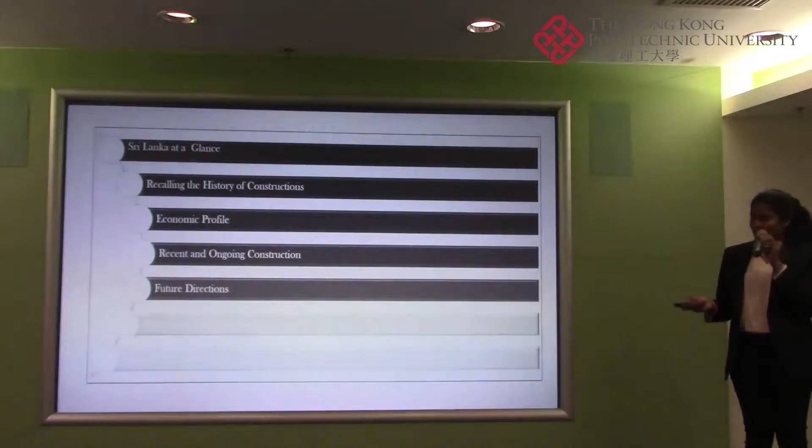Future directions of the construction industry: sustainable construction.

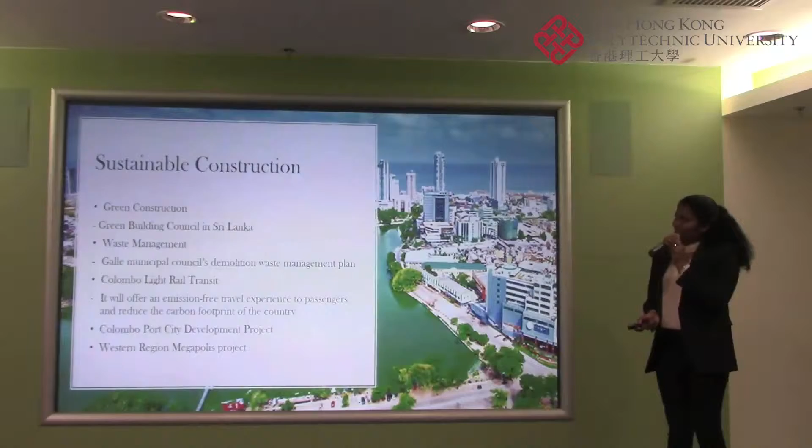Everywhere in the globe, they are talking about sustainable construction. Green construction is one of the initiatives contributing to sustainable construction in Sri Lanka. Therefore, a Green Building Council has been initiated in Sri Lanka, establishing its grading criteria, and there are many construction projects undergoing with these regulations and grading criteria.

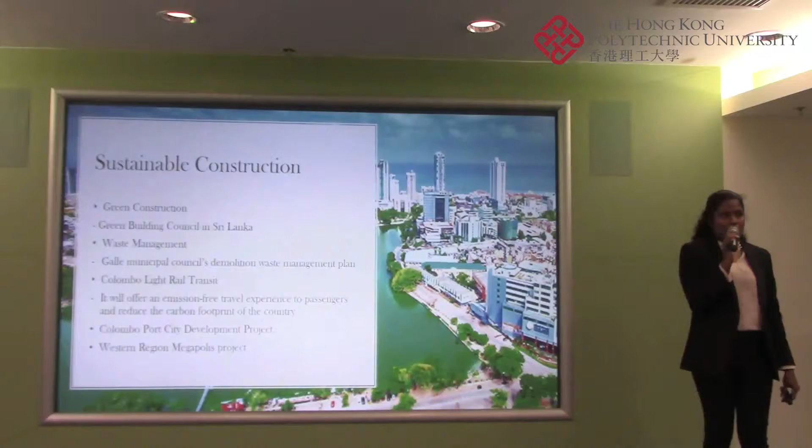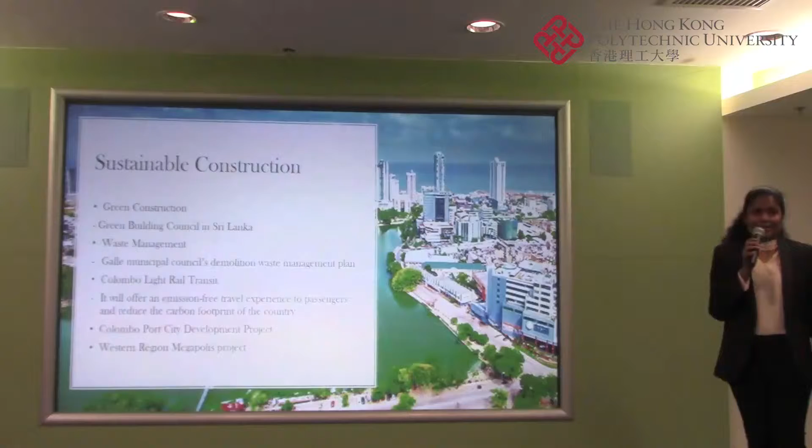The waste management plan adhered to by the Galle Municipal Council for demolition of buildings is another significant area to be considered in sustainable construction. Most municipal councils in Sri Lanka are planning to adhere to the same demolition plan in time to come. As explained earlier, the Colombo Light Rail Transit System is one of the smart city development projects.

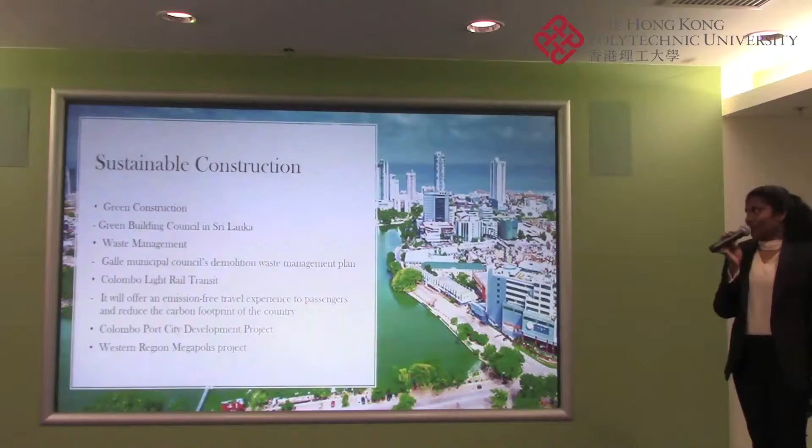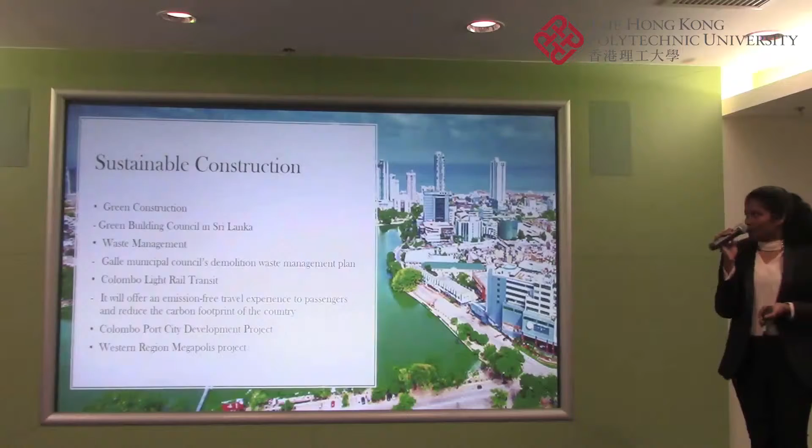This construction will offer an emission-free travel experience to passengers, contributing to sustainable construction in Sri Lanka. Apart from that, the Colombo Port City Development Project, as discussed earlier, is also another contributor to sustainable construction. The Western Region Megapolis Project, which I will explain further in coming slides, is also a significant project which contributes to sustainable construction.

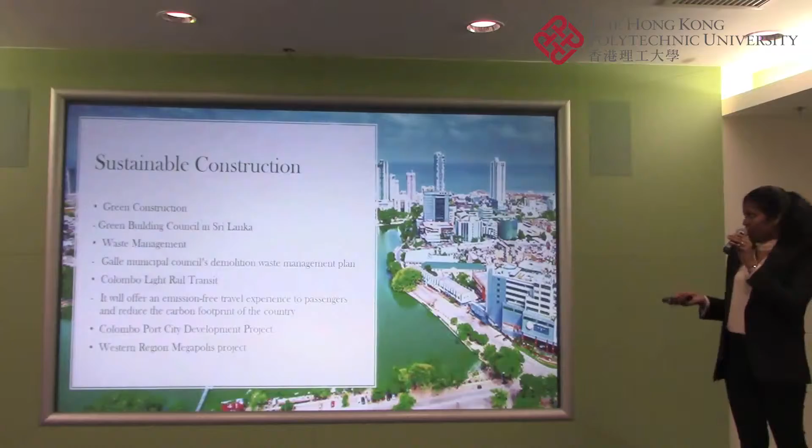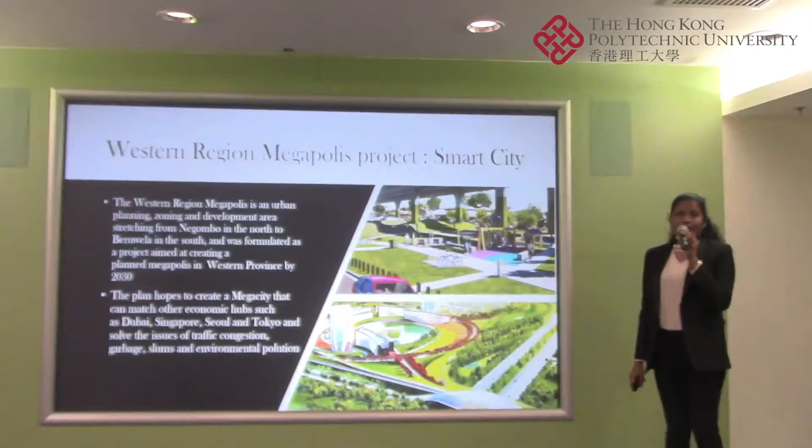The Western Region Megapolis construction project goes beyond the smart city concept; it's an urban planning, zoning and development area stretching from Negombo in the north to Beruwela in the south, formulated as a project aimed at creating a planned megapolis in the Western Province by 2030.

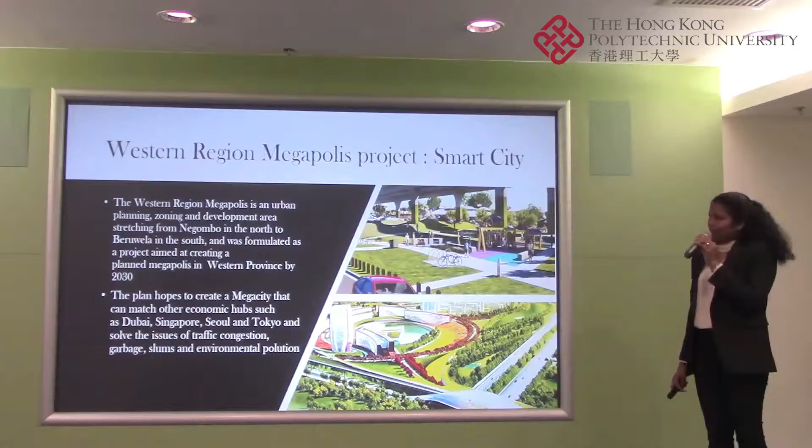The plan hopes to create a mega city that can match other economic hubs such as Singapore, Seoul, and Tokyo, and it will be a great solution for traffic congestion, garbage, slums, and environmental pollution. There are 11 sectors to be considered in the Western Region Megapolis Development Project.

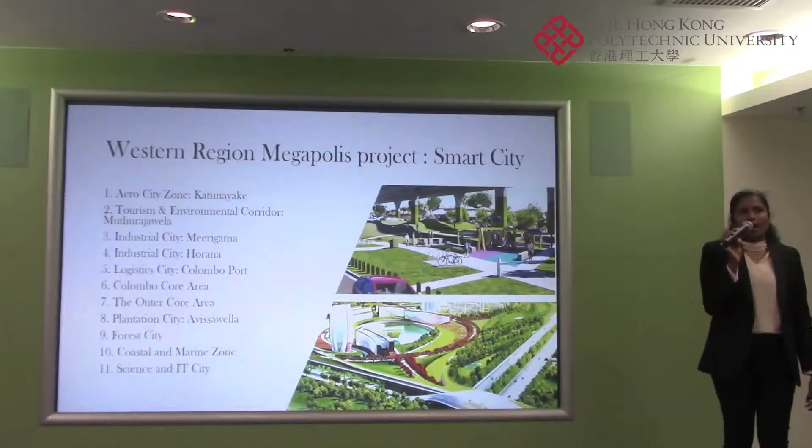The first category is the Aero City Zone at Katunayake. The government is going to expand the airport area of Katunayake, building a new passenger terminal, and with the outer circular highway, they are going to make the transport system more efficient towards Katunayake airport.

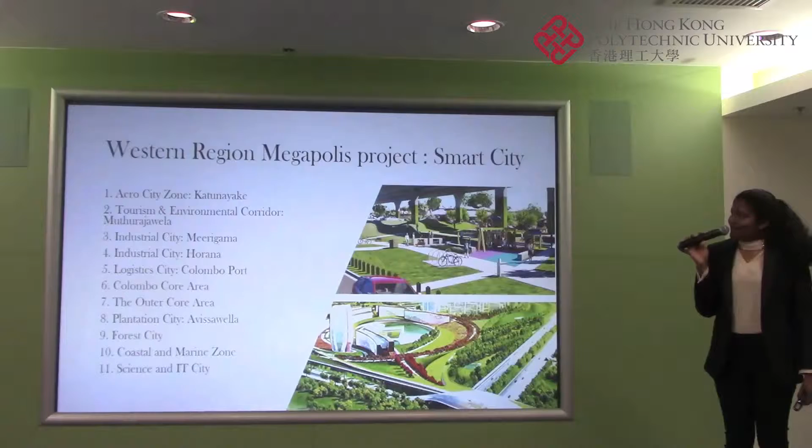The second is the tourism and environment corridor at Muthurajawela, basically focusing on the hotel industry and tourist attraction. The industrial city of Meerigama will focus on small and medium scale entrepreneurship, with pharmaceuticals and other food and beverage industries located in the Meerigama area.

The second industrial city will be Horana, where massive industries such as tyres, tubes, and energy generation projects will be established. The fifth sector is the logistics city.

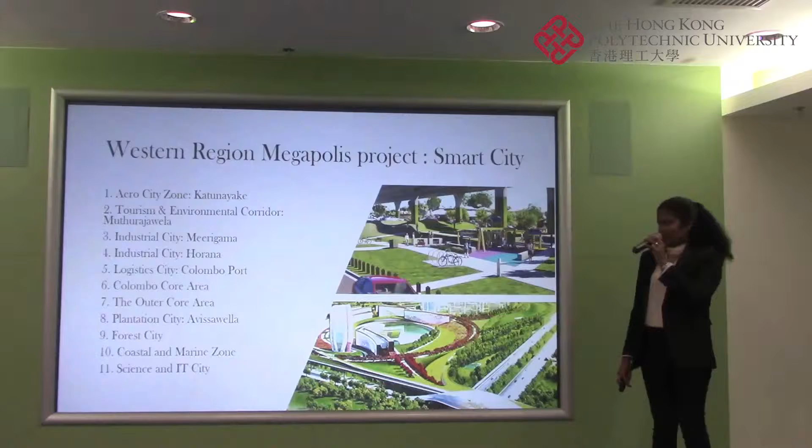Circulated by Colombo Port, we are going to have an electrified railway system as well as massive bus transportation, ferry and boat transportation systems within the city of Colombo. We call this area the logistics city, and the major smart city can be seen in time to come. Other core areas are also expected to be developed along with this Western Region Megapolis project.

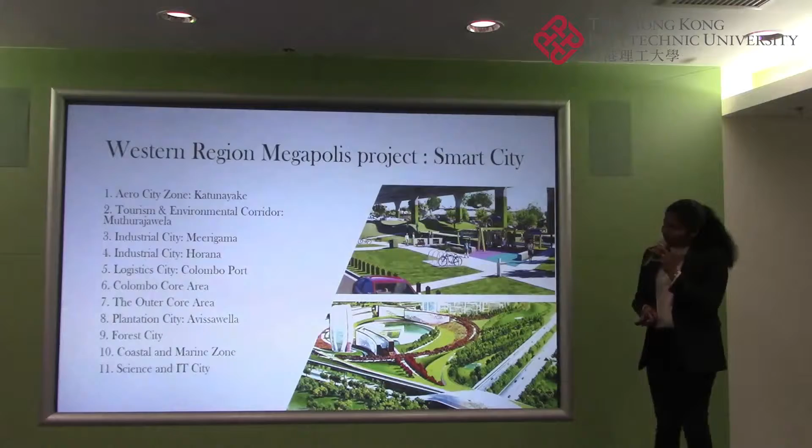These areas will be moderately dense over time. The plantation city will be Avissawella, where we expect much agricultural production and exporting facilities, achieving a sustainable city. The forest city will also be located near Avissawella, targeting ecotourism and go-green concepts.

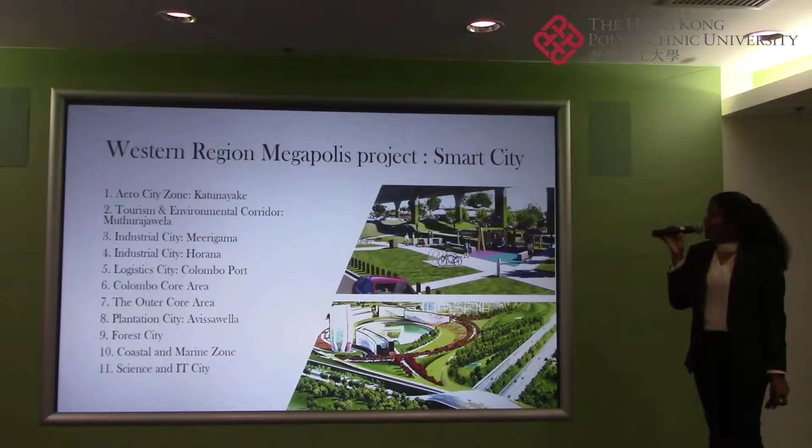The coastal and marine zone along Colombo city will also be redeveloped according to smart city concepts, mostly targeting the international crowd. The science and IT city is the last consideration of the smart city concept.

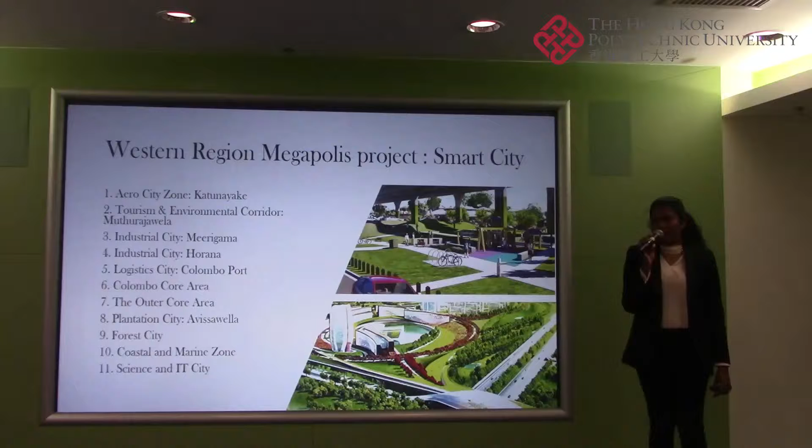We are going to locate the Science and IT City from Homagama to Kaduwela, and this area will be basically allocated for research and development centers on nanotechnologies, robotics, energy efficient building construction, and other IT-related research and development.

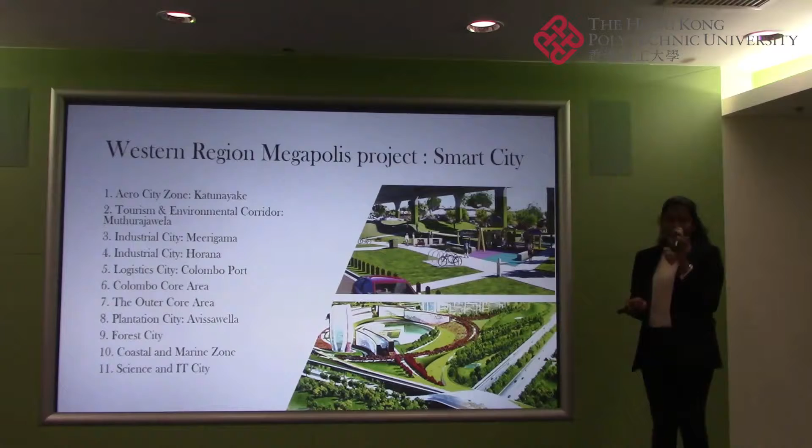More or less, this Western Region Megapolis project will contribute to the smart city and the sustainable world in time to come. As the second solution of sustainable construction, prefabricated construction is also initiated in the Sri Lankan construction industry.

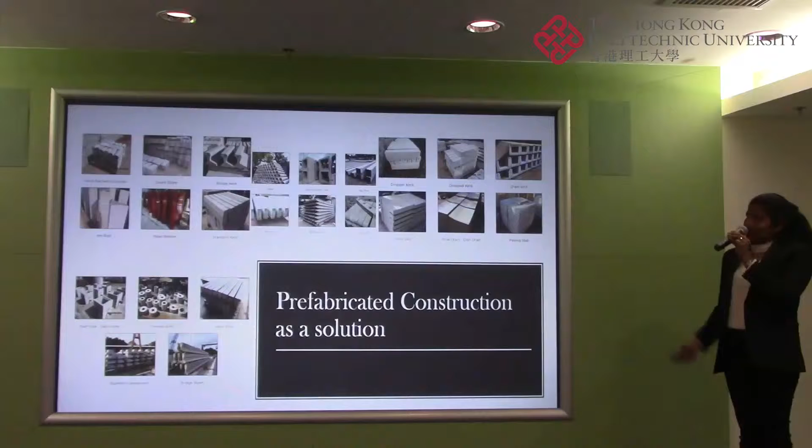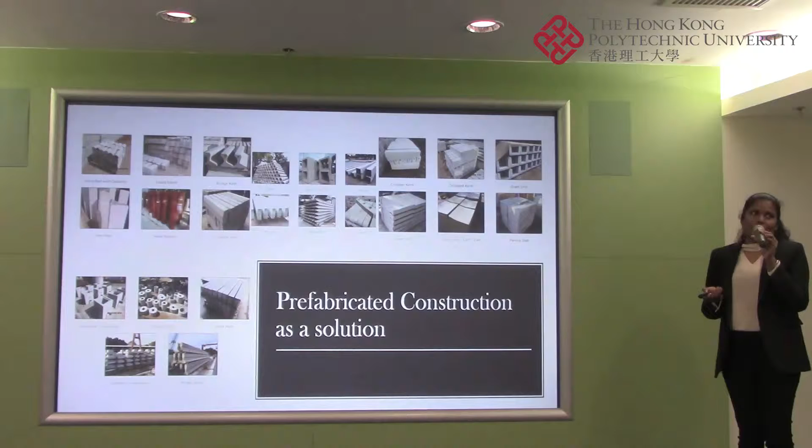We cannot see mega constructions in Sri Lanka using prefabricated construction elements, but there are some apartment complexes and other infrastructure facility development projects which utilize this kind of prefabricated construction element in Sri Lanka. Now it has become an emerging trend of construction, and it gives the answer for the requirement of labor, addressing the shortage of skilled labor in the Sri Lankan construction industry.

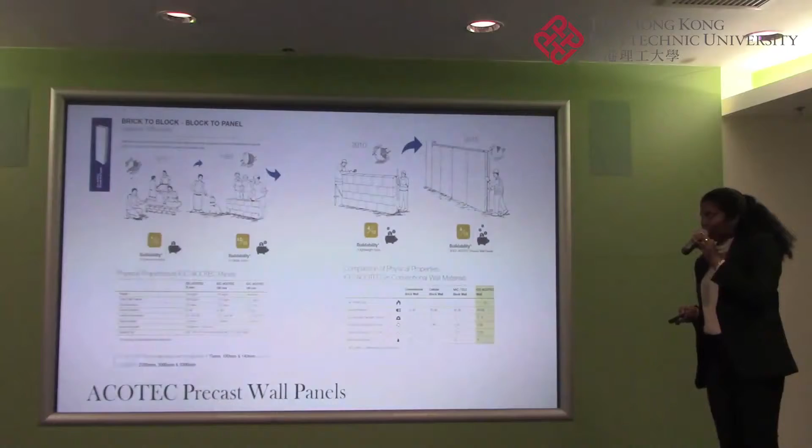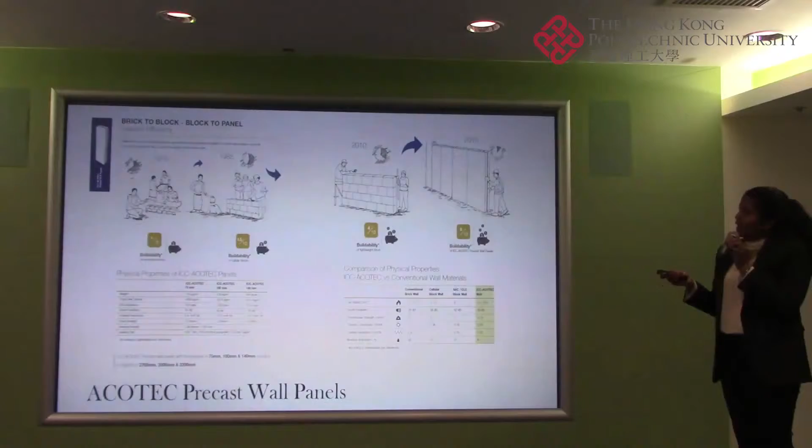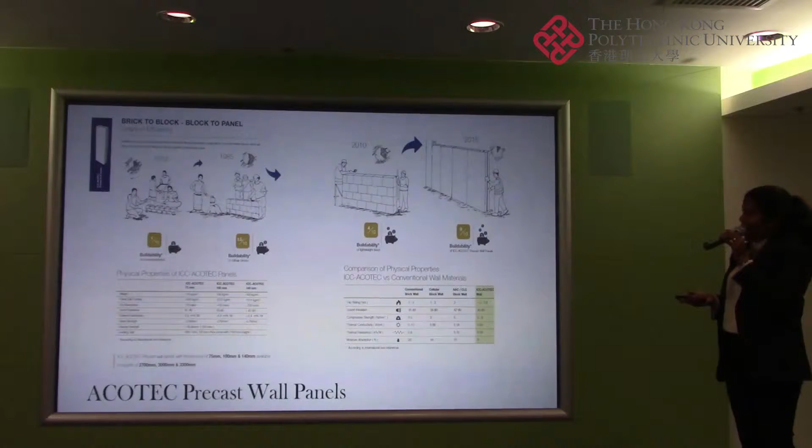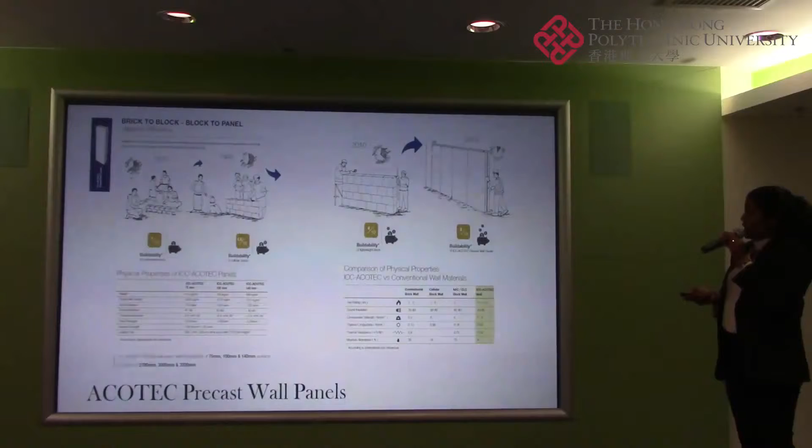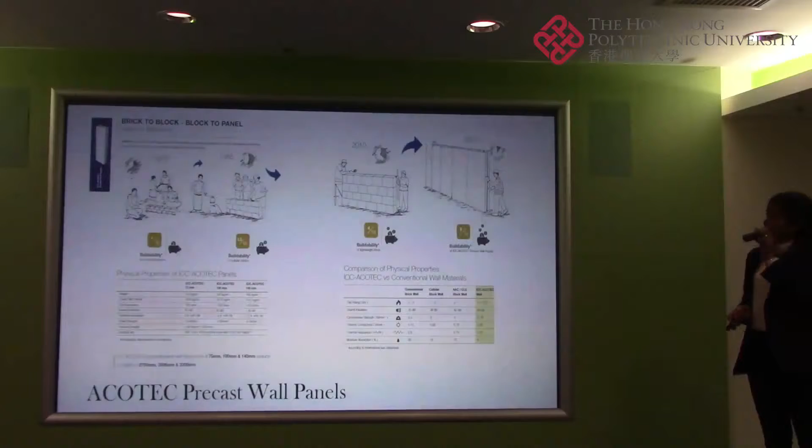Then in 2015 we shifted to precast wall panels, and now the buildability of the construction process has increased to 0.9%.

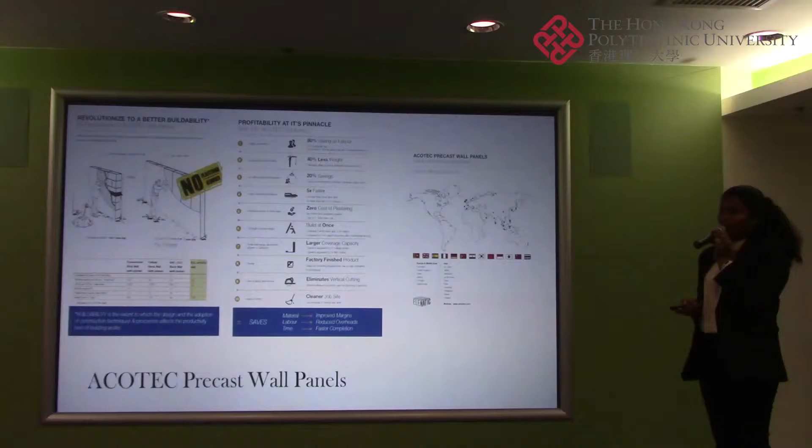Another important feature of this construction material is that we need not have plastering in construction, and it will give us a better quality of work.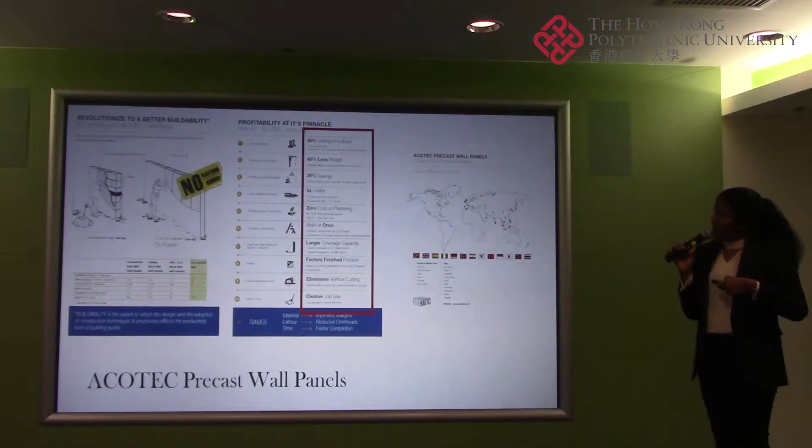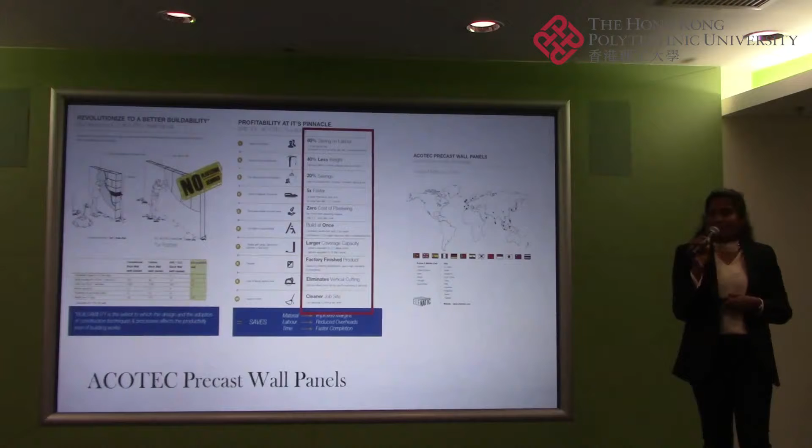Therefore, these ACOTEC precast wall panels allow us 80% savings on labor, 40% less weight of handling. It will reduce machinery and equipment cost, 20% savings on formwork reinforcement, and it's 5 times faster, with zero cost for plastering, and it can be built at once, which speeds up construction projects.

Larger coverage capacity is also possible with these panels, and it's a factory finished product that eliminates vertical cutting. There are inside cores on these ACOTEC panels, and we can easily install service lines using these cores. Finally, it will allow us to have a cleaner job site.

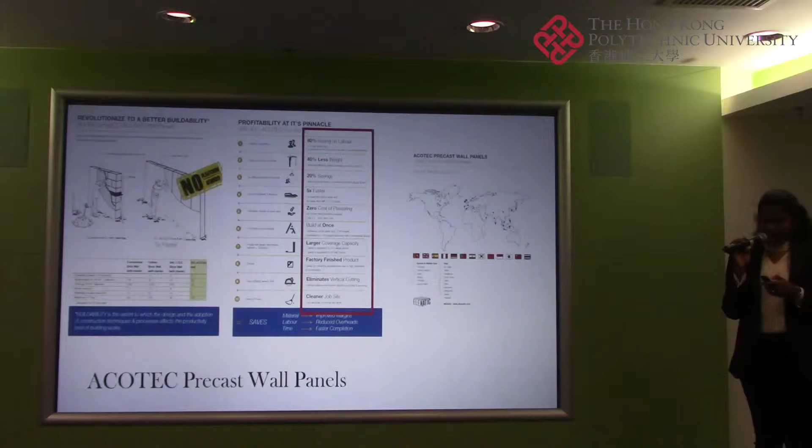As the initiator of precast wall panels, we are exporting our products to a number of countries, including Germany, the United Kingdom, and Spain as well.

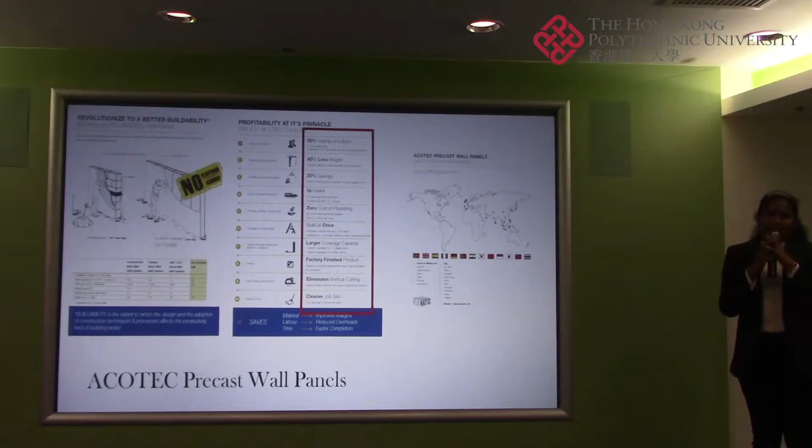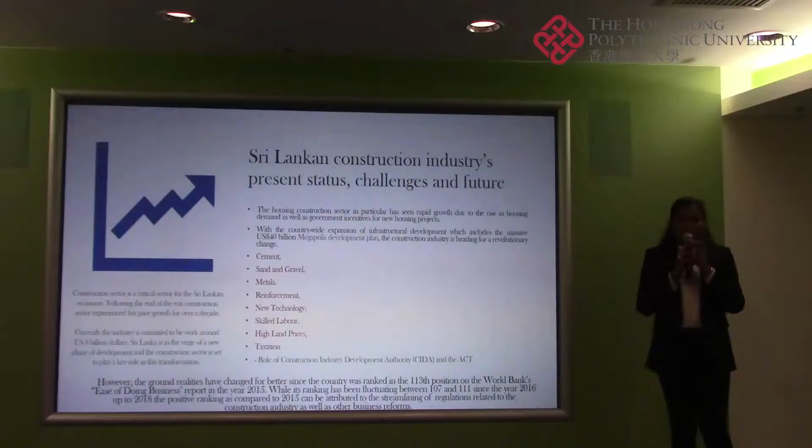The present status, challenges, and future of the Sri Lankan construction industry. Although there can be a booming and rapid growth of the construction industry realized with newly constructed and ongoing projects, there are some problems and challenges faced by the Sri Lankan construction industry.

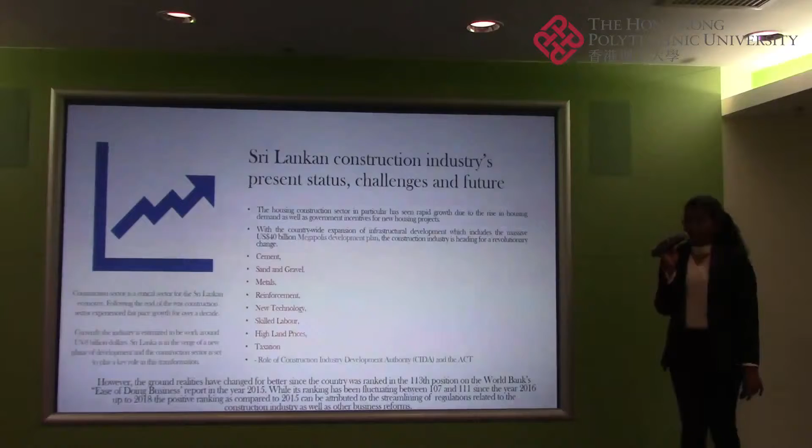The massive challenge faced by the Sri Lankan construction industry is scarcity of materials. Cement, sand, gravel, and metal, especially reinforcement prices, are drastically pricing up within the construction industry due to the scarcity of materials. And we are struggling with new technologies such as prefabricated construction.

Finding skilled labor is another significant challenge emerging nowadays, and that's why prefabricated construction is being initiated in the construction industry as a solution.

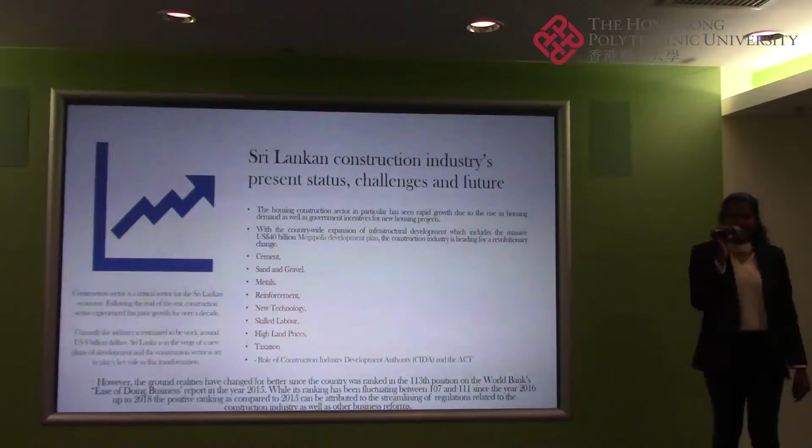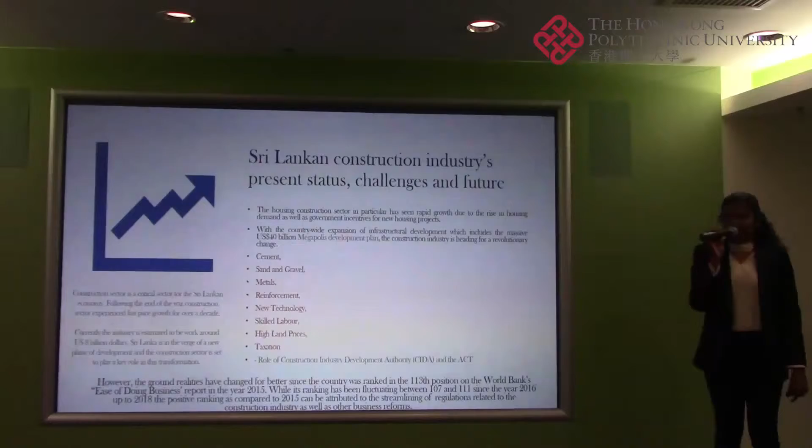High land prices are another issue for investors looking to build construction projects in Sri Lanka. However, with time, it will become a manageable position.

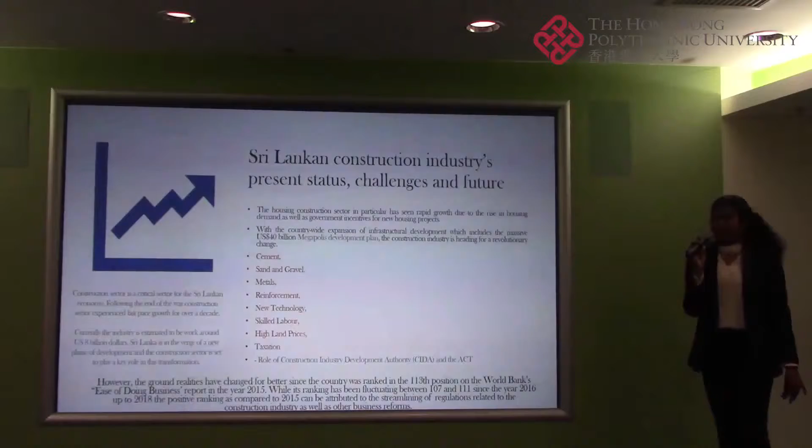Taxation is another consideration we need to think about when constructing buildings or developing infrastructure facilities in Sri Lanka. Therefore, there's a role to play from the Construction Industry Development Authority and the Construction Industry Development Act to overcome these challenges in time to come.

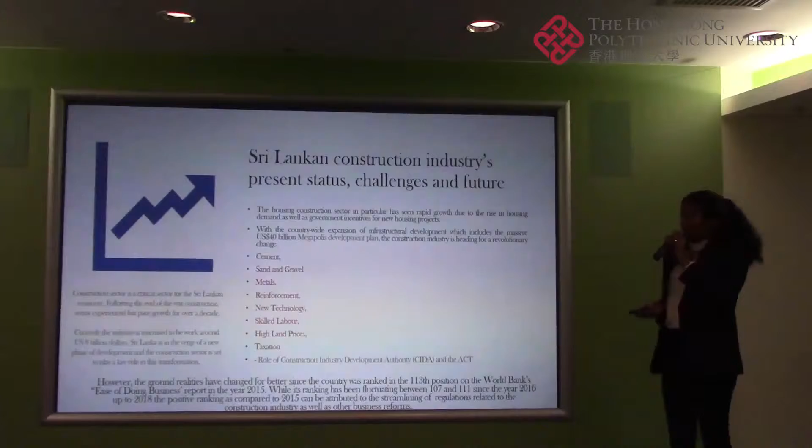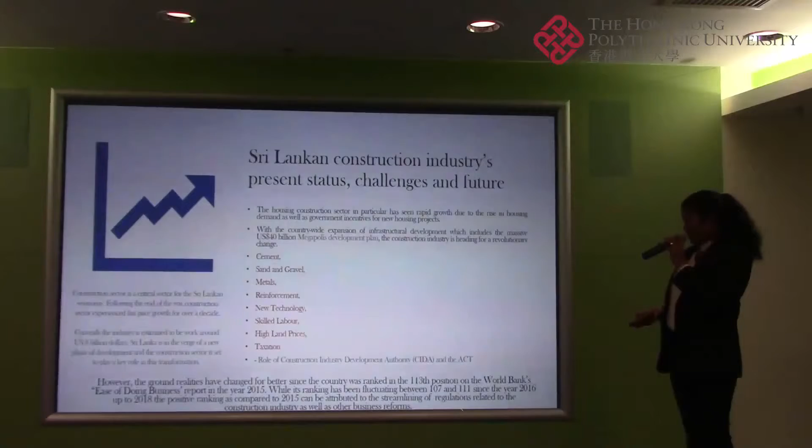But according to recent reports, according to the World Bank's Ease of Doing Business reports, Sri Lanka is ranked 107th and 111th in year 2016, which signifies the ease of doing business in Sri Lanka.

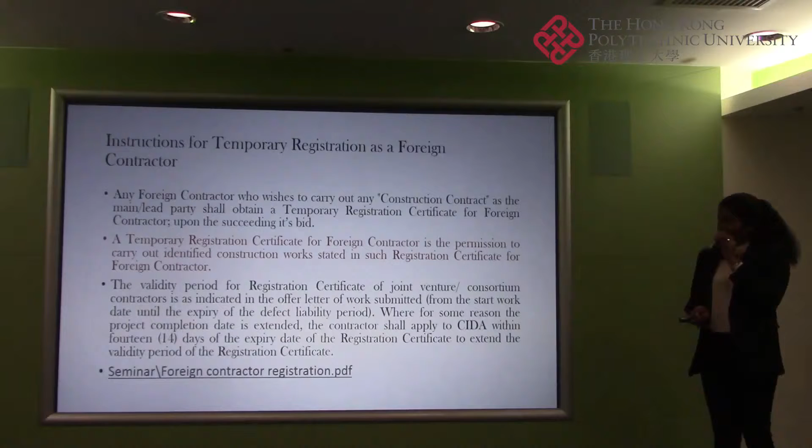If a foreign contractor is going to be a contractor for a Sri Lankan project, first they need to do a temporary registration. They need to follow the temporary registration process in Sri Lanka. On the Construction Industry Development Authority site, you can find further details about this temporary registration, and it's mandatory before initiating construction businesses in Sri Lanka.

Future investment opportunities: along with the Colombo International Financial City Development Project, we are going to create future investment opportunities for international delegates and investors to come and invest in Sri Lanka. Actually, it's touted as an international financial center funded from Chinese investment.

The city will have a separate legal and financial system which is likely to be governed by Chinese firms that control the land through the Supreme Court of Sri Lanka. This is one of the megapolis developments, and it will be useful for future investment opportunities.

International Island, which is going to be constructed as part of the Port City Development Construction Project, will also be a beneficial area where future investment opportunities can be seen. This is the master plan of the project, and you can see a significant amount of the area is allocated for International Island, where international businesses can be initiated.

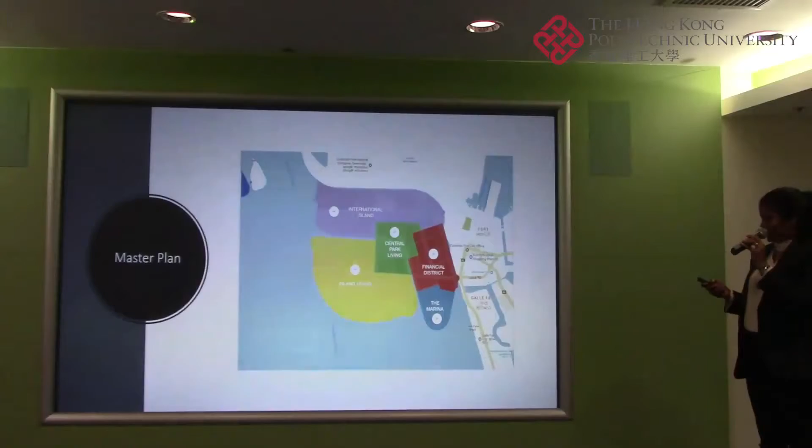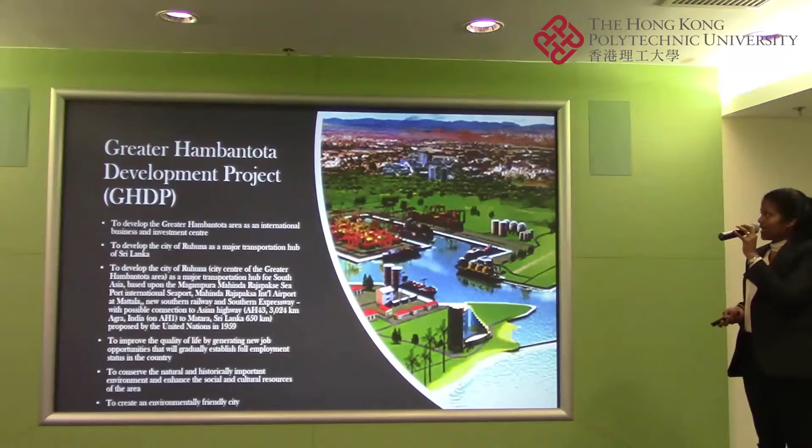Greater Hambantota Development Project is another possible investment opportunity in Sri Lanka. Along with the development of Hambantota Port, they are going to develop greater Hambantota area as an international business and investment center, so it will be another investment opportunity for investors.

The last part of my presentation is supply chain resilience, which is my PhD concentration. I don't want to go through the slides one by one; I would like to give you a brief explanation on the concept of resilience.

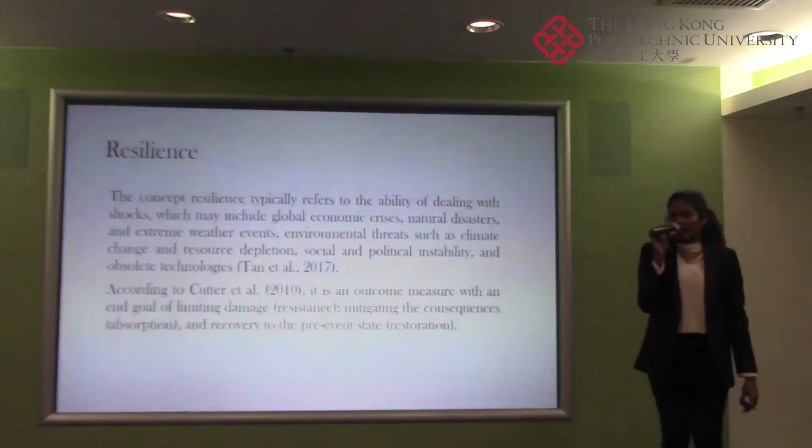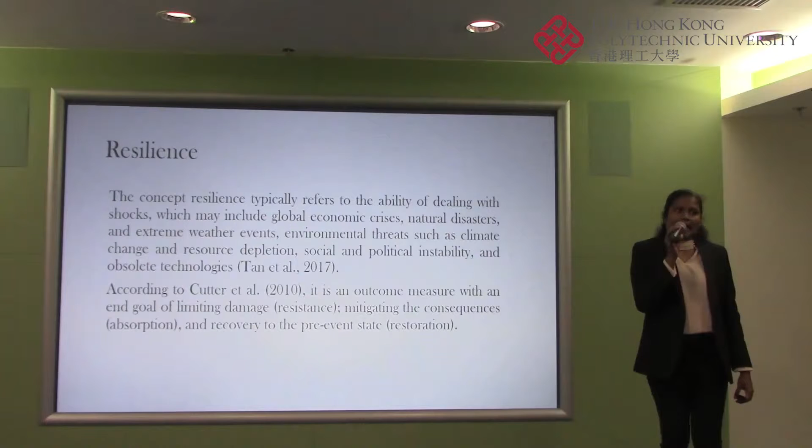Think of a rubber band. If you expand the rubber band and release it, the rubber band will come back to its previous position within a few seconds. That is what we call resilience. If any kind of system is resilient, although it goes through any kind of disturbance, it will come back or return to the existing safe position in a very short time.

As well, the consequences of the disturbance are not that great, and the outcome will not affect the entire initiation of any kind of activity or project.

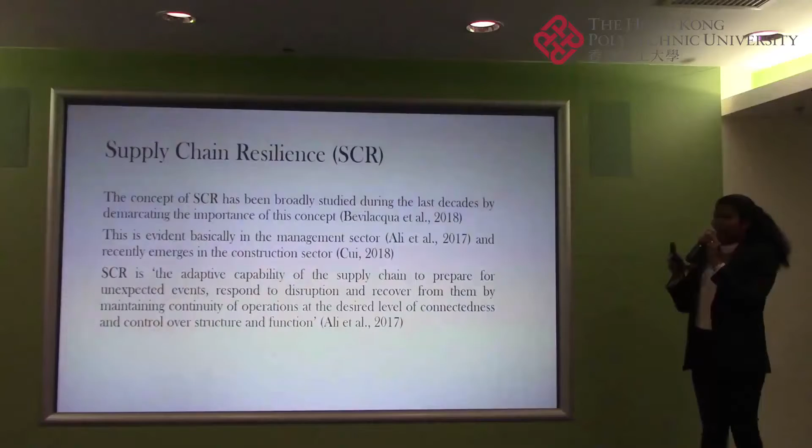So supply chain resilience is also a concept that has been broadly studied during the previous decades. It's the adaptive capability of any kind of supply chain to prepare for unexpected events, respond to disruption, and recover from them by maintaining continuity of operation, without disturbing continual operations and at the desired level of connectedness and control over structure and function.

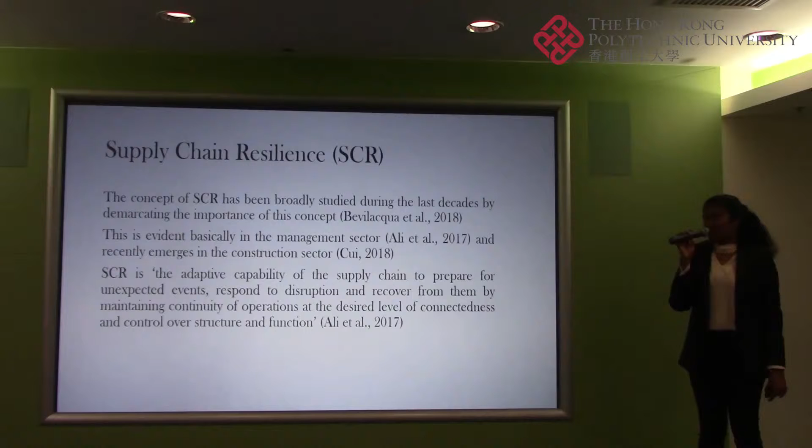Mostly, people are utilizing risk management approaches in the construction industry or any kind of industry to mitigate the impact of disturbances. However, it has been found that it's very hard to assess the risk before the construction is held, and it's also very hard to find low probability, high impact events. So existing risk management approaches don't address these issues, and also these approaches are very expensive, and they only react when something happens.

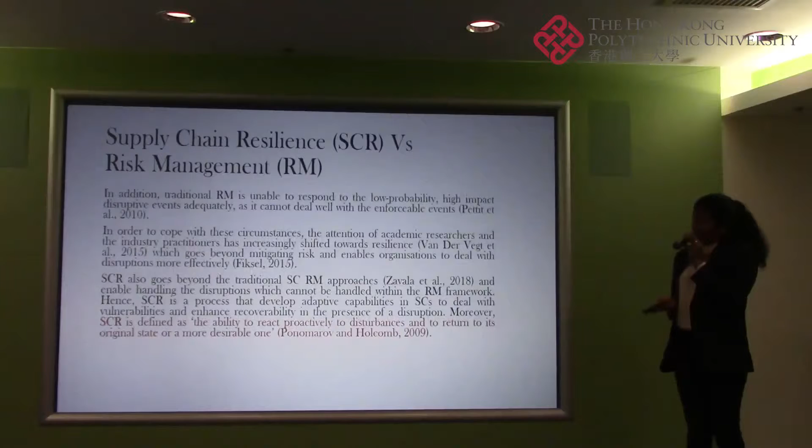But if a system is resilient, it has the capability to withstand these disruptions at any time of the operation. So supply chain resilience as a concept comes to the stage because of these requirements.

Talking about supply chain resilience, it's the balance between capabilities and vulnerabilities. Vulnerabilities we can call the disruptions that happen to any kind of operation. There should be some capabilities to withstand these vulnerabilities - the capabilities are the capacity developers, capacity builders of any kind of project. So if your system undergoes a higher amount of disruptions, we call that a much vulnerable system. And if you have adequate capabilities to withstand this disruption, we call this system a very resilient system, where they have the ability to absorb these disruptions in a positive manner.

So that is the rationale behind supply chain resilience and the resilient system. Now, as an emerging trend, supply chain resilience is also emerging in the construction industry, but no attempt has been taken to consider supply chain resilience in industrialized, prefabricated construction so far. Therefore, my research focus is towards achieving supply chain resilience in industrialized construction.

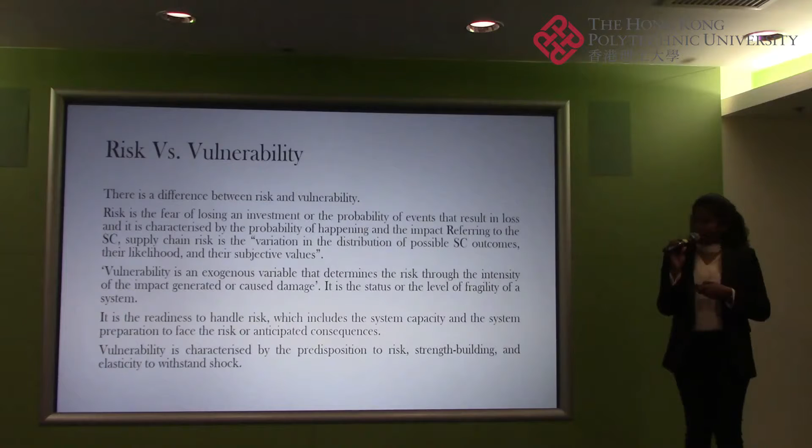Talking about supply chain resilience, I would like to draw your attention to a few more concepts. The first thing is risk versus vulnerability. Most people believe risk is similar to vulnerability. Actually these two things are two separate concepts, and I would like to take an example to explain further what the difference is between risk and vulnerability.

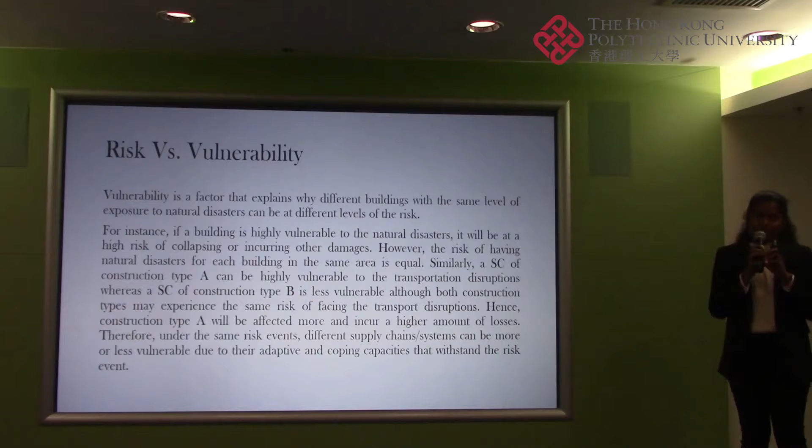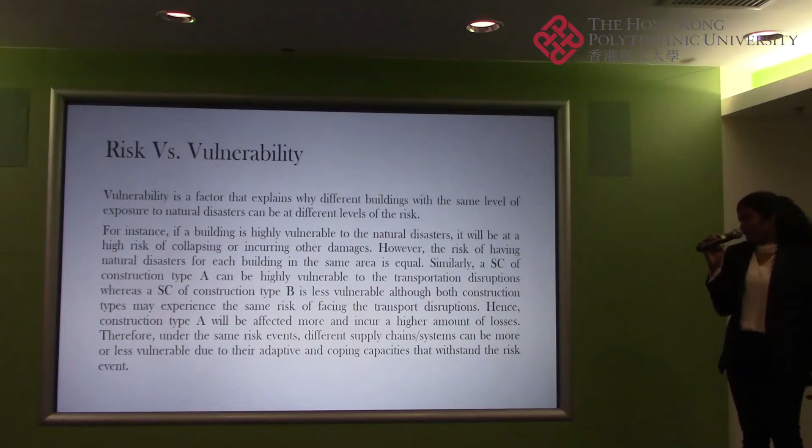If a building is highly vulnerable to natural disasters, it will be at high risk of collapsing or incurring other damages. However, the risk of having natural disasters for each building in the same area is similar or equal. Similarly, a supply chain of construction type A can be highly vulnerable to transportation disruptions compared to construction type B, although both construction types may experience the same risk of facing transport disruptions. Hence, construction type A will be affected a lot and will incur a higher amount of losses. So hope you can understand the difference between vulnerability and risk.

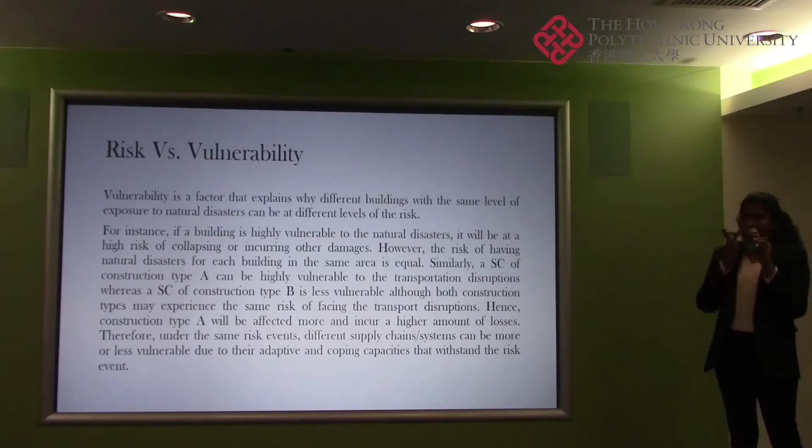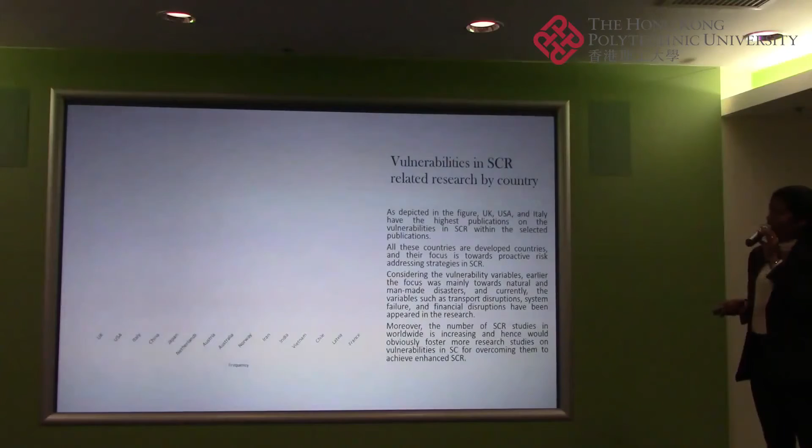This graph shows the researchers based on country - UK, USA, and Italy as developed countries, they are contributing a lot to supply chain resilience related research because they value the concept of supply chain resilience compared to risk management processes.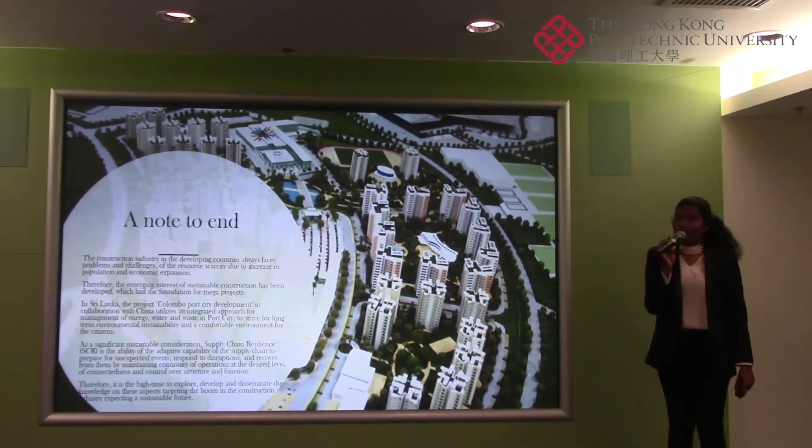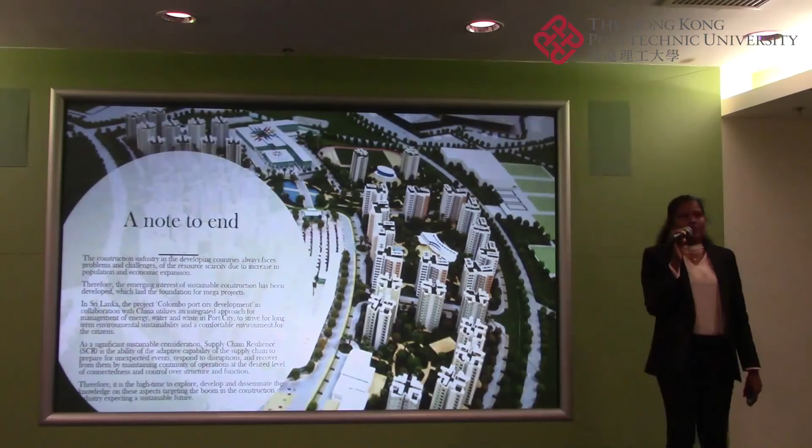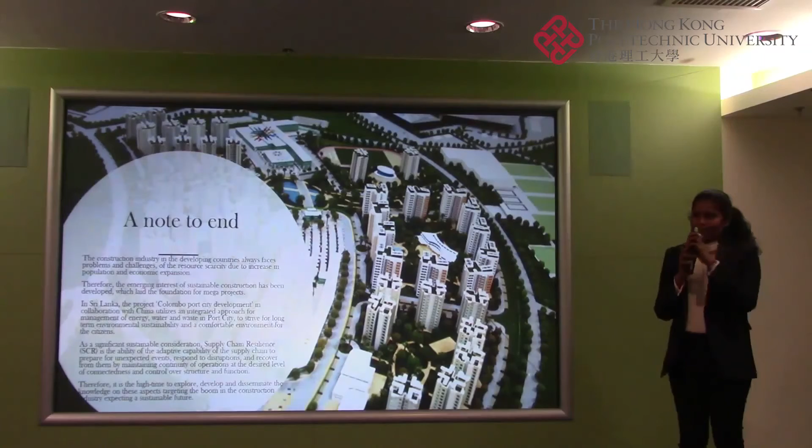Moving on to the end of my presentation, there's an outline. The construction industry in developing countries is facing a number of challenges and struggling, and on the other hand, they are striving for sustainability concepts. In Sri Lanka, the Port City along with the Western Region Megapolis Development Projects are basically targeting sustainable construction aspects. And as one of the sustainable considerations, supply chain resilience is also emerging, and therefore this is the high time to talk about these aspects.